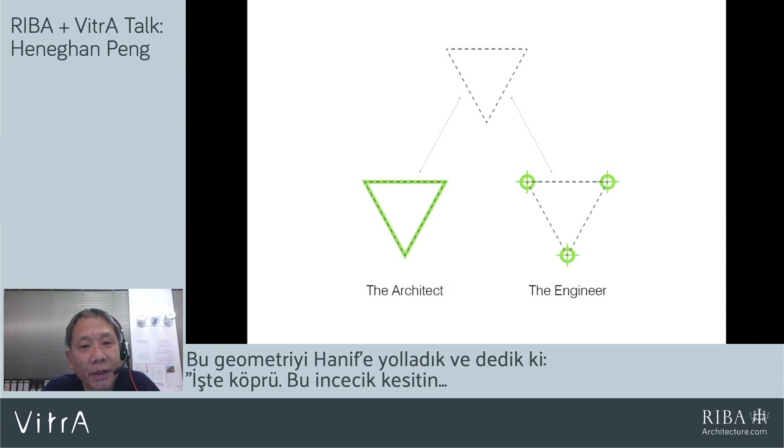It's a common language in terms of the collaboration between the architect, who you see here on the left-hand side, and the engineer, on the right-hand side. The best example of this is when we did the bridge for the London Olympics. We worked with Hanif Kara of AKT2. This is a cross section of the bridge, which is a triangle. We sent our geometry over to Hanif and said, here's the bridge, let's see if the very thin cross section could span the Carpenter's Lock.

Interestingly enough, by the time we got to the competition, they came back and said, "Oh, no problem, it works." What we discovered immediately after we won is that the triangle the architect took was actually the skin of the bridge, which is the architectural component. What AKT took as the triangle are their centroids, which is the grid. In structural terminology, that is very much what they would use for analysis.

The best part about this is the engineering component doesn't actually fit into the architectural component. They both desperately desire to occupy that same triangle in the exact same place and time. Obviously, we got it working in the end, no problem. But it's this kind of disjunction that we believe the grid is very successful in addressing.

So this is just a basic diagram showing the degree of architecturalness. On the left-hand side, you have low architecturalness. On the right-hand side, you have extreme architecturalness, which we would call iconic projects. The funny thing is that, oddly enough, the more architectural a project becomes, the less engineering it becomes; they literally work in exact opposites. Is there somehow a happy meeting point between architecture and engineering?

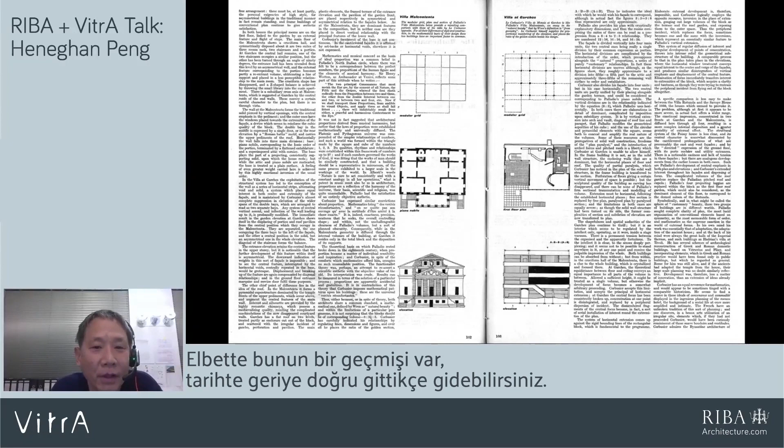Obviously this has its history. It just goes back and back further in history. On the left-hand side is Palladio. On the right-hand side is actually Garches by Corbusier, and you can see the red lines, which talk about an AB organization of the grid.

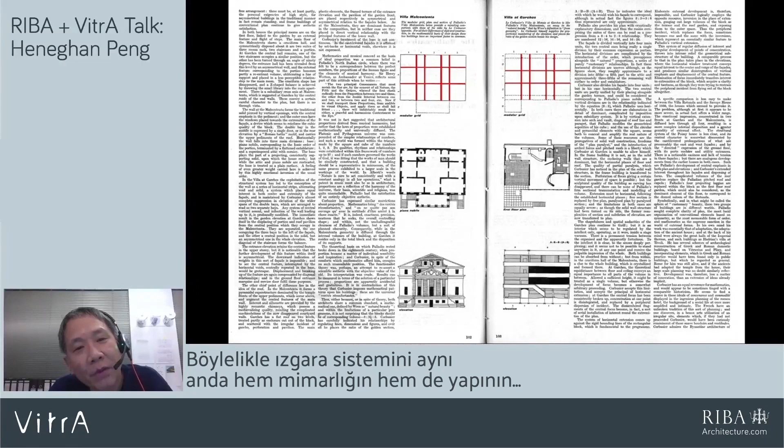Obviously, it's much looser for Corbusier, but those red lines are very clearly the structural lines that keep the building up, and simultaneously they create a rhythm between what is primary and secondary, at least going north and south within each building, and a kind of triptych organization in both directions. So one can begin to see that the grid can be both architecture and structure simultaneously.

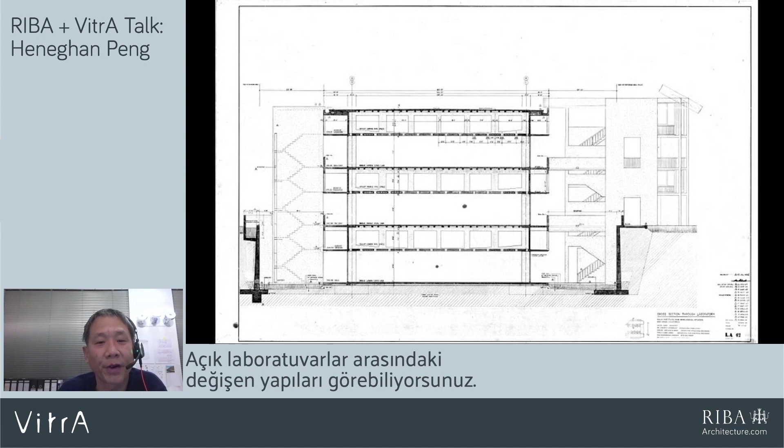The classic modern example of this is Kahn. He and his engineer Komendant have, within every single one of these buildings, very much described that architecture and structure cannot be separated. The prime example is the Salk Institute. Here you see the Vierendeel trusses, the space in between the open labs. At the sectional level, the grid, which is the level planes of the truss zone or the service zone, very much describes both the structure of the building, which creates these columnless spaces, but simultaneously also the service areas that serve both above and below.

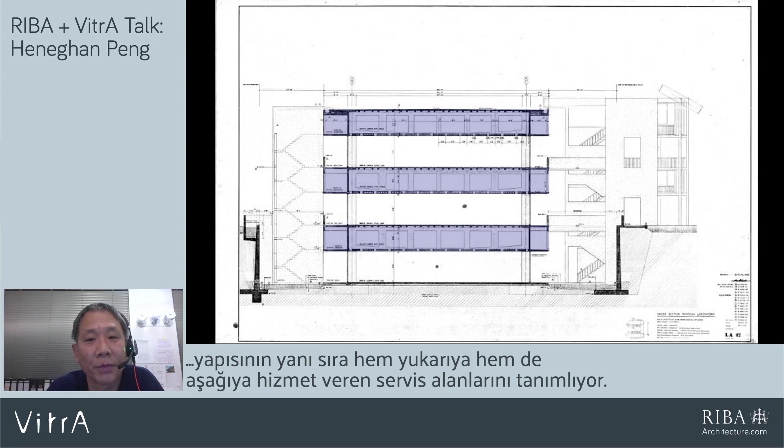And what this begins to show is that if you find the intersection between two ratios, and Francis Archer can actually do this in his head, the XY positions of over 90% of the points are actually rational numbers. They are not irrational numbers with funny things after them. So you can pretty much know where any seemingly random form is in three-dimensional space by understanding the relationship of two ratios.

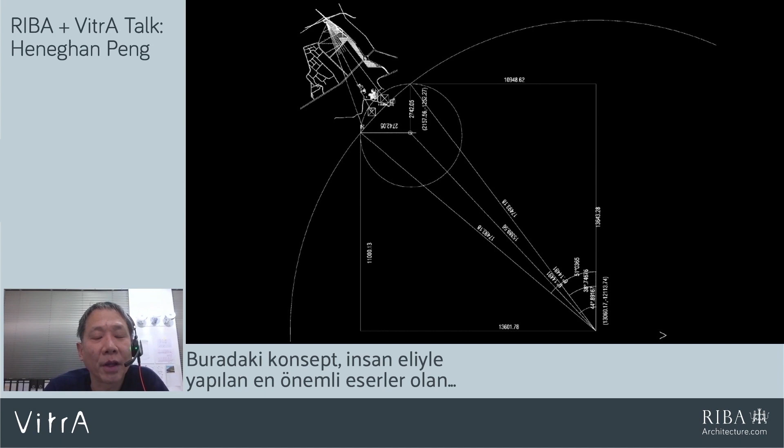You can see that the 3 pyramids, any 3 points describe an arc. Here, you can see that the pyramids describe an arc from the lower right-hand corner. And the museum on the upper left-hand corner is actually kind of a mirror of those 3 lines. The concept being that the museum actually inscribes within its galleries all 3 pyramids, which are the most important artifacts.

So we'll touch on the architecture, but because that's not really the point of the talk, I'm going to try to just hit a few bullet points. Egypt or the Nile is described by 2 starkly juxtaposed conditions. That of the desert plateau, which is approximately 60 meters above that of the Nile Valley. The Nile irrigates the Nile Valley at the lower level and creates an intense greenness.

And everything we know to the left and right of the Nile as one extends beyond the kind of lush green Nile Valley will be the desert plateau, meaning the tombs, Tutankhamun, all of that of death will actually occur within the desert, and that of life in the Nile Valley.

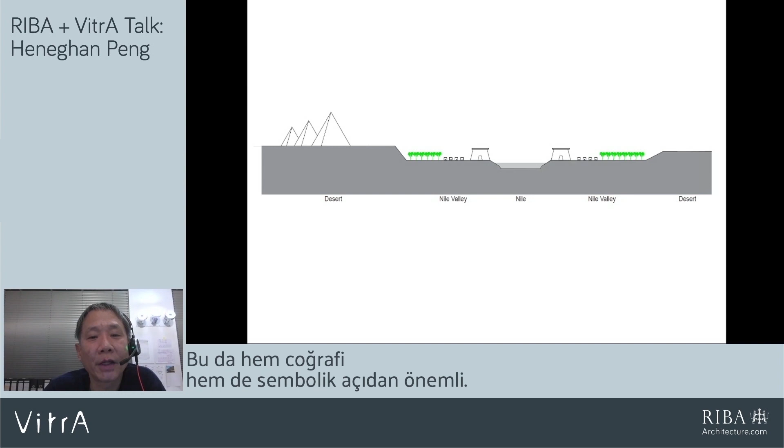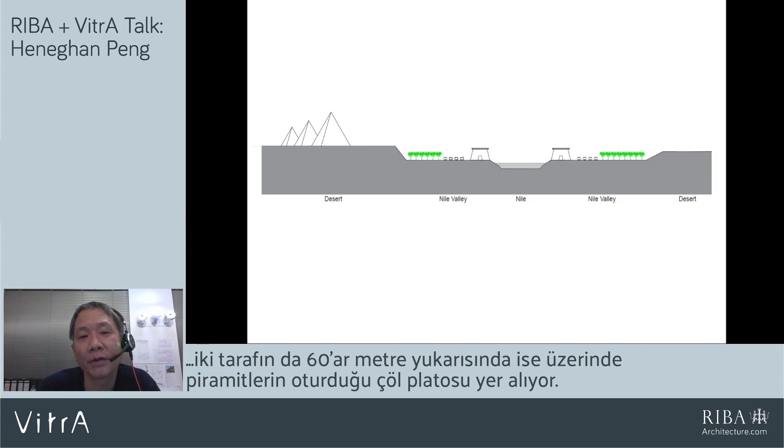Here you can see a cross-section through the kind of geographic landscape, which is both important geographically and symbolically. You see the Nile in the middle. To either side where the trees are is the Nile Valley, and lifted 60 meters above to either side would be the desert plateau, on top of which the pyramids would sit.

The site is actually fantastically located. It's located precisely at the point where the desert plateau would rise and the Nile Valley would end. So again, just by the mere selection of this site, which would house Tutankhamun, it would very much describe the geographic and symbolic importance of this kind of geological condition as something that very much described Egypt all through its history.

So as far as the grid is concerned, the most important thing of any grid is to set the origin. So regardless of anything, we need to start somewhere. We set it on the upper left-hand corner where you see the lines occur. It is actually in a traffic roundabout. The client didn't like that, but you don't really see it in the end, so maybe that would work for him. So we fan out this kind of line.

The first line actually is precisely the line where the 60-meter sectional condition would occur, where the Nile Valley would stop and the desert plateau would arise. And from that kind of geological condition, we fan out the museum to capture all three pyramids within its kind of space or body.

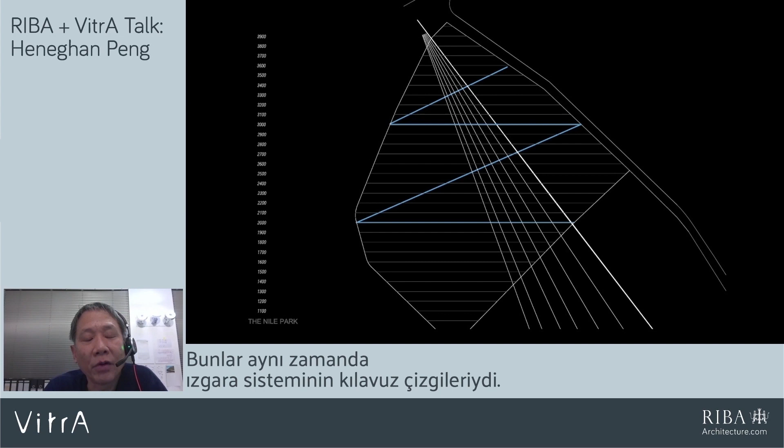It is a museum, it is a chronological museum, so overlaid onto the site is a chronological series of horizontal lines going from the most modern times to the lower portion of the screen, which is the furthest back in history. And those would effectively be also the grid lines.

Here you can see on the left-hand side is the line that is between the traffic roundabout and the tallest of the pyramids, and how it fans, and that again is the kind of cliff face or sectional condition as it fans out to capture all three pyramids. We actually also in section connect the museum to the top of the tallest pyramid.

And the funny thing about this is that in order to get our perfect numbers, we actually have two drawings which connect to the top of the pyramids. One is the architectural drawing, which connects this kind of mysterious height with a funny number that we can't figure out why. And the second drawing with the red line actually connects to a perfect number, which has all zeros after that. We use the perfect number drawing for the construction set because it produces perfect numbers in the museum. And we use the funny number one for the client because it has to be architecturally mythical and connected.

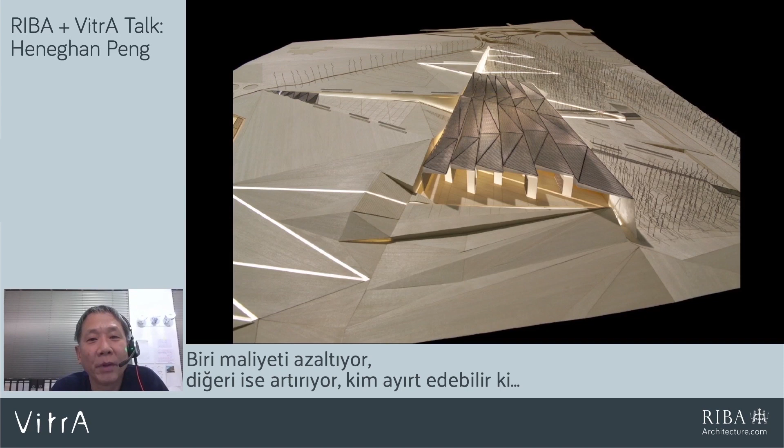One saves money, one costs money. Nobody can tell. So this is the view of the museum from above with the fanning roof that goes out to the pyramids.

So the grid: typically what happens in a building is that one puts the grid itself, or the building grid or the column grid, however you call it, over the building. And the spaces or landscape around the building would be designed by landscape architects.

For us, that wasn't possible because, first of all, the museum had two aspects to it. There was a museum which dealt with all the antiquities, and then there was something called the 24-hour museum, which is all the landscape within its periphery. And that is in many ways the living museum, because that will be an open park which will be available as public space for one of the countries with the least amount of public space per capita in the world. So it was an important part to engage both local and international.

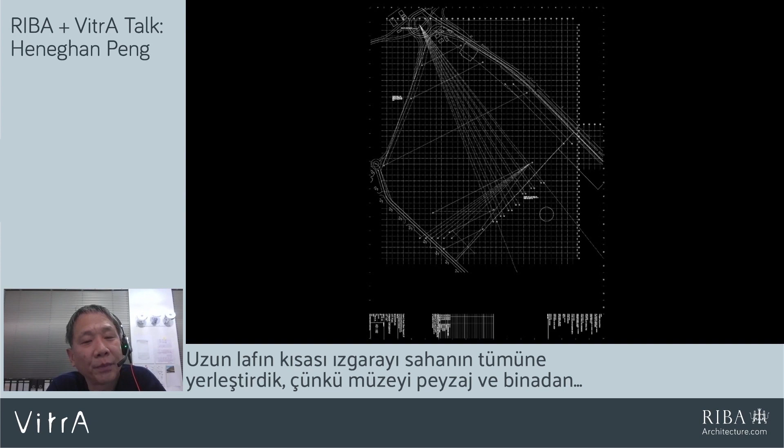But the long and the short of it is that we put the grid over the entire site, because that allows one system to capture the entire museum, both landscape and building, within one holistic system. In some ways it's like the Nile Valley, the irrigation system that was controlled by the state in order to regulate, to govern.

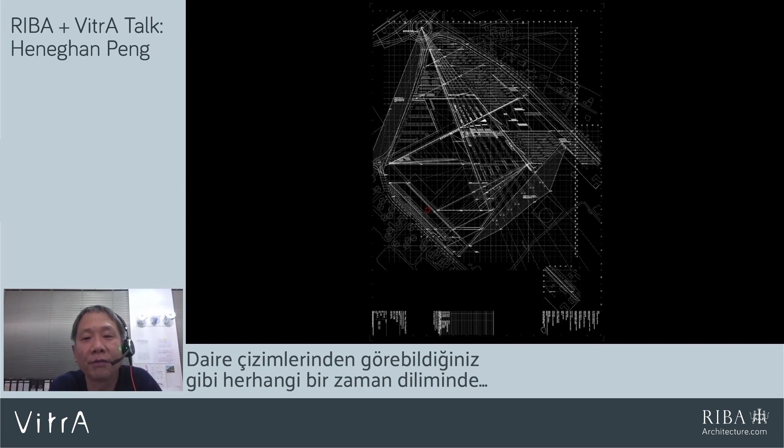The building would then use that grid to describe itself over the entirety of the site. So at any one point, anywhere on the site, whether it's a tree, a bench, a toilet, a plinth, all of it can be found within the grid system. So, similar to the drawing of the random circles, we can find anything anywhere at any one point in time extremely quickly.

Overlaid onto that is something they call the Nile Park. That was an important component of the brief. And the Nile Park for us doesn't divide what is architecture and landscape. It merges the two together because it traverses both landscape and architecture without actually flinching.

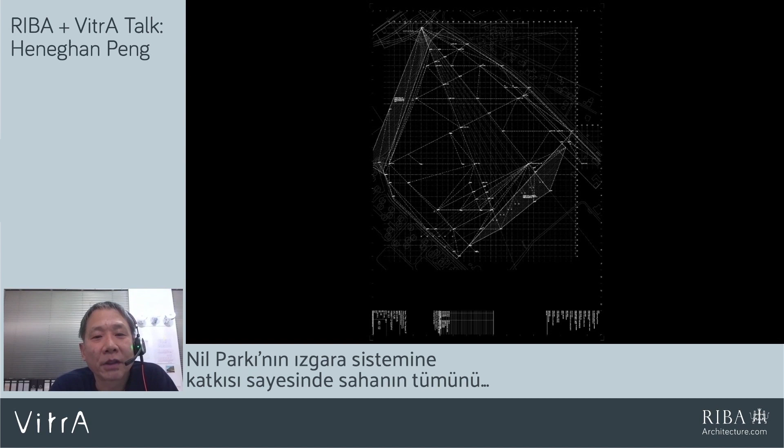The site is a little bit over a kilometer by a kilometer. What the Nile Park does, with the grid, is allow us to triangulate the whole site. So rather than doing contours, which is extremely geometrically heavy and very hard to locate and control, we can control the entire topography in terms of its ups and downs and sectional condition with just a fragment of the number of points that are needed to control it via contours. So this was very powerful because we were moving masses and masses of sand in large swoops rather than trying to shunt them around with tiny contour lines.

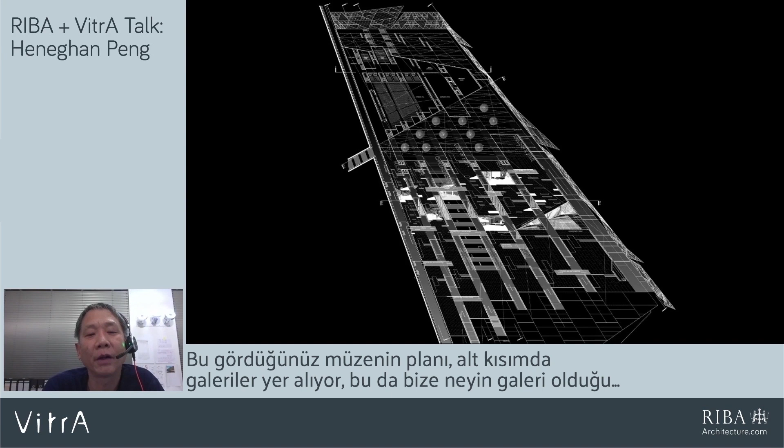This begins to hark back. This is the plan of the museum with the lower portion being the galleries. This starts to touch back on the previous image with Palladio and Corbusier, where we have the spacing of what is gallery versus what serves. The blue being the service zones, and the remaining space in between would be that of the galleries.

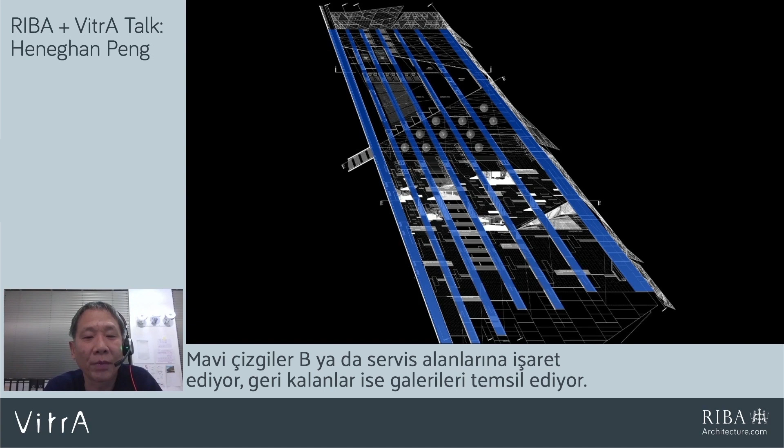The reason we use the number 12 is that it's good for value engineering, because it's the smallest number with the maximum number of divisors. So 12 can be divided by 1, 2, 3, 4, 6, and 12. So again, it allows us to cut things like glass sizes, stone sizes, everything within the building, to smaller sizes or increase them, in order to value engineer the project, but also to limit the number of redraws, because we can subdivide and pretty much the building stays on grid.

The trick behind this is that part of the museum, let's see if that, oh, nope, there. We'll talk about that later, but the museum is actually formed off two systems, one which is the number 12, which is 1200, the other which is a binary system. And the grid that Francis drew didn't work in terms of the binary.

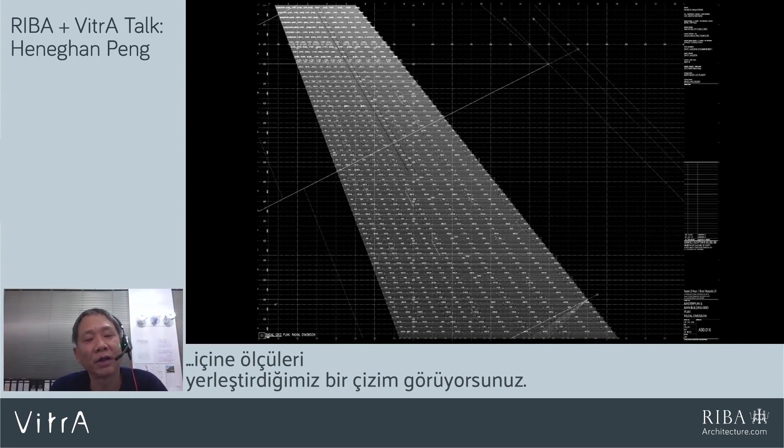So let's just say that's the grid. This was just a drawing. We put dimensions in to illustrate the fact that the formula actually works. And if I zoom in, okay, so if I take the grid line, you can see in the middle right, S18. So if I take 18, which is the grid line, multiply that by 25, and multiply that again by 18, I get the number 8,100. You can see right there, the number next to S18 is 8,100.

And you can pretty much go through the entire plan, and you will have every dimension without seeing a single dimension in the drawing. You just need the grid line, and you need to remember that previous formula: 25 times grid line times the unit.

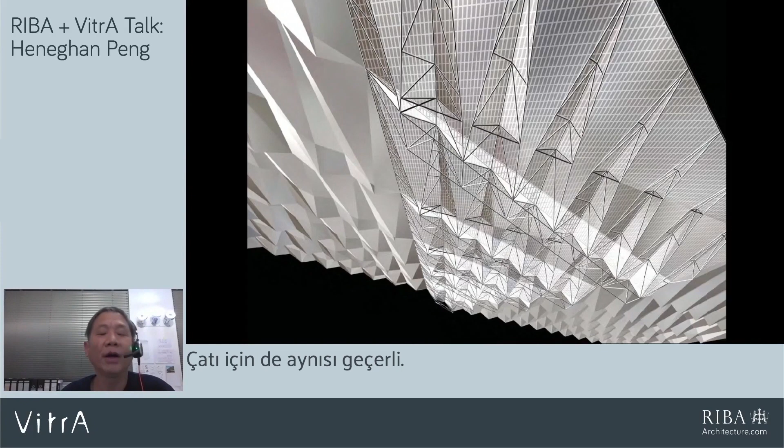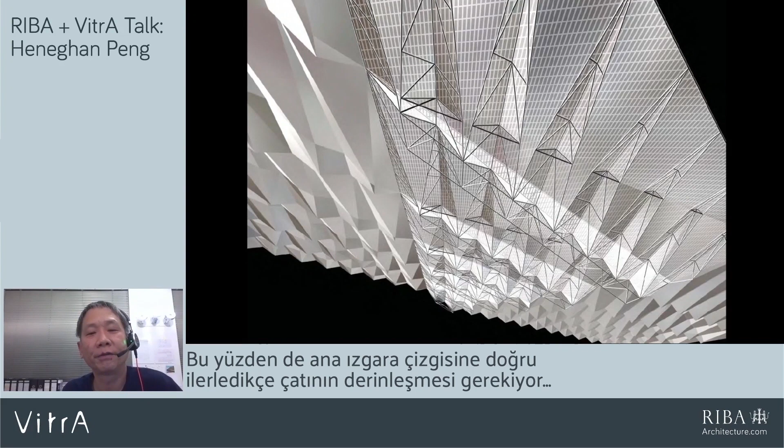The roof does the same thing. It spans over different portions of the building. Obviously, the 30s and 36s would be the narrow span. The 54s and 66s would be the higher span. So the roof would need to get deeper as it moved towards the primary grid line, which is the sectional conditions between desert and Nile Valley. So similar to that, I'm clicking on the wrong thing, is the roof.

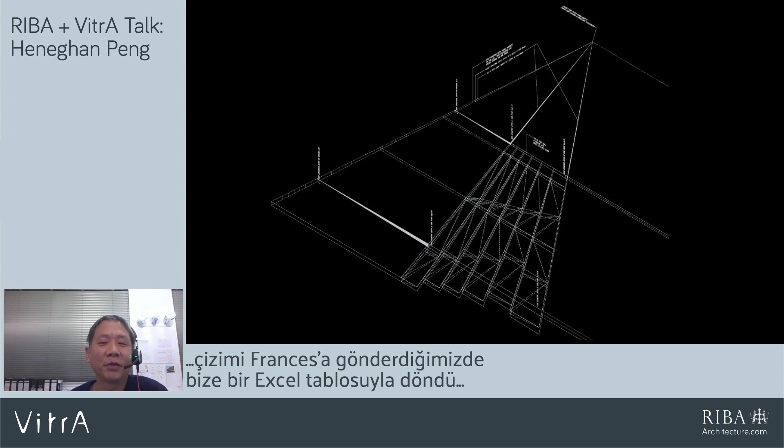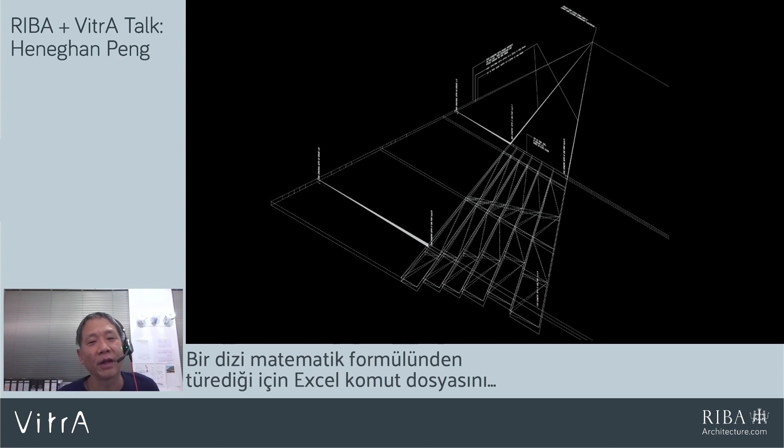I think actually Francis figured out the roof. But anyway, when we finally sent over the final drawing to Francis, he just came back with an Excel spreadsheet, and we said, what are we supposed to do with this? He just said, double click on it. And because it is derived through a series of mathematical formulas, you can pretty much just run an Excel script and it will draw the entire roof for you.

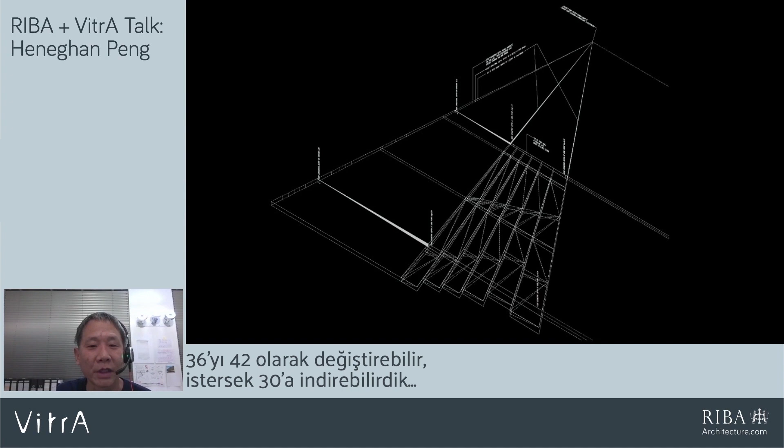And obviously that means we can also modify it as much as we want. We can change the 36 to 42 or the 36 back down to 30 if we need to, and the Excel would just update automatically. Here's the building with the roof off. You can see the B, which is the service zones, and also the 30s, 36, 54, 66 zones of the galleries themselves. And the roof would top the whole thing.

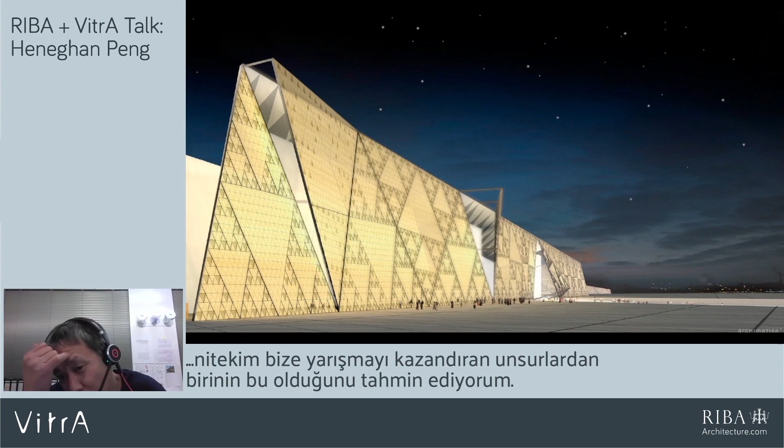So the biggest, most daunting task is this kilometer-long translucent stone wall, which probably was one of the things that won us the competition. It was great that it won us the competition, but it was also very difficult to do. So what do we do? And this is actually a spin-off of a talk we did on weak stone.

So fundamentally, translucent stone is terrible. It generally is used for things like vases, and it's a semi-precious stone. So at the end of the day, it's very weak. It was never meant to be used structurally. And what's interesting about the whole journey was that because of its inherent problem, it no longer has a solution. And because it is problematic, it forces one to invent. For us, that was the most enjoyable part of the project. How do we deal with something fundamentally weak?

There's a large quantity of stone, approximately 4 football fields. You actually need 6 football fields because of the amount of wastage, but it's a lot of semi-precious stone. So in the end, we actually don't buy stone from quarries. We buy quarries in order to get the project done.

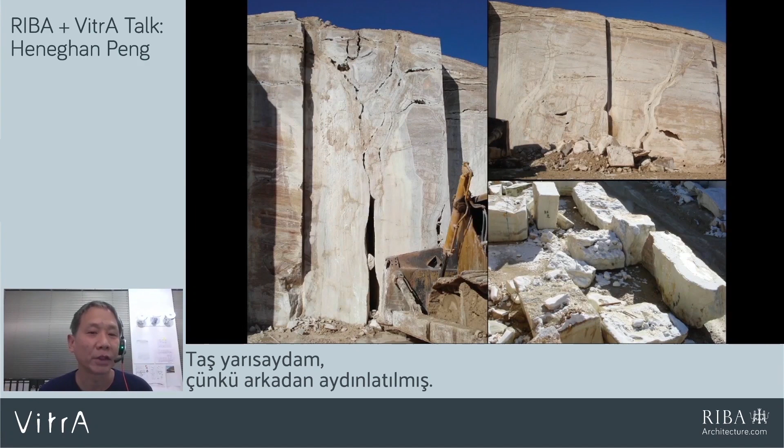So here you see onyx. We switched from alabaster to onyx. Alabaster is gypsum. Onyx is silicate, which is effectively glass, so it's a much stronger stone. So that was a substantial structural shift. It's translucent because it's illuminated from behind. This is one of the quarries that Bruno went to visit.

So the first thing we had to do is you have to test longevity of the stone. So this is something we did in the UK at BRE, where we pushed the stone through some kind of highly accelerated testing. And what this simulates is the effect of sand and wind and rain and so forth on the stone over a course of 50 to 100 years.

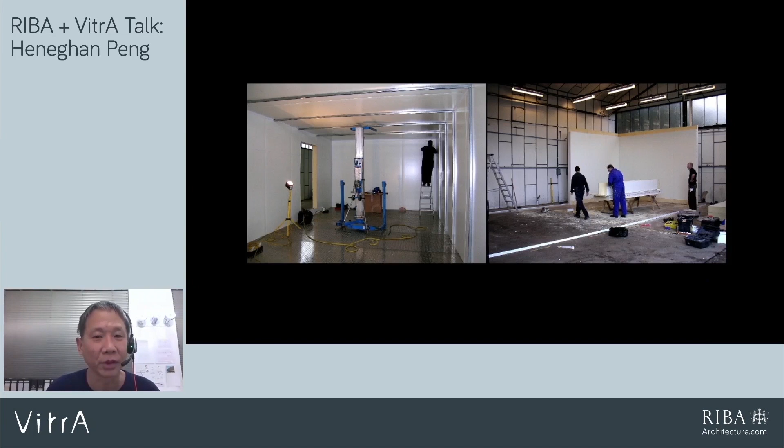This is the testing chamber that was being built, and this is a view inside, hitting with everything from sandblasting to UV, wind, and so forth. The next issue is there's a stone, but there's also the steel that holds it up.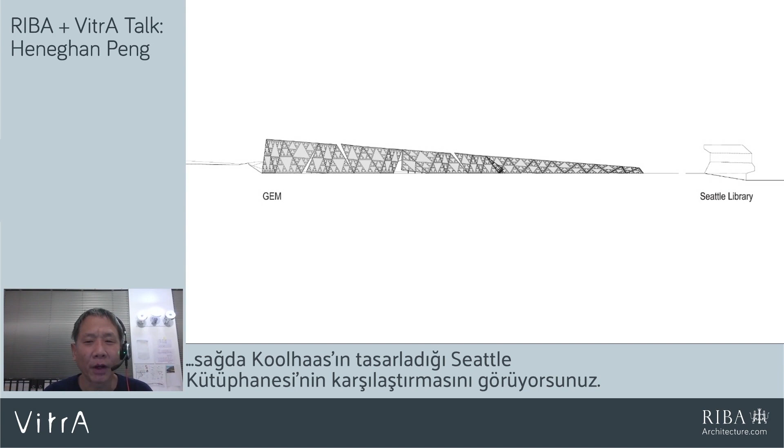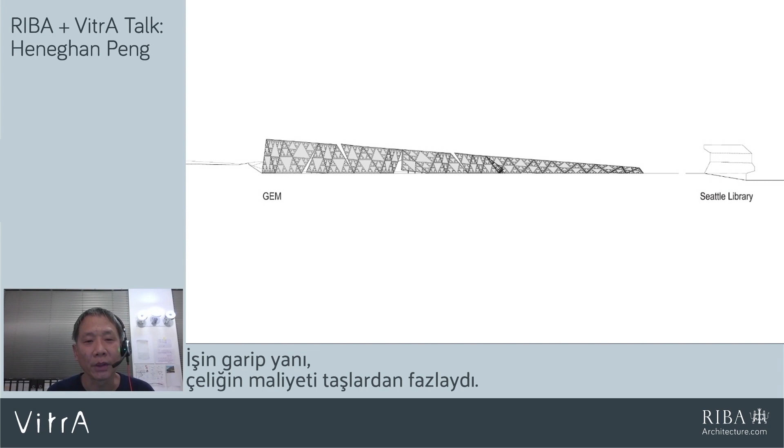This is just a comparison between the GEM, which is the Egyptian Museum, on the left, and on the right-hand side, that's Koolhaas's Seattle Library. You can see the quantum of stone. It's substantially a lot of stone. And the thing about it is the steel actually, oddly enough, cost more than the stone. So there was also a necessity to somehow economize on the steel.

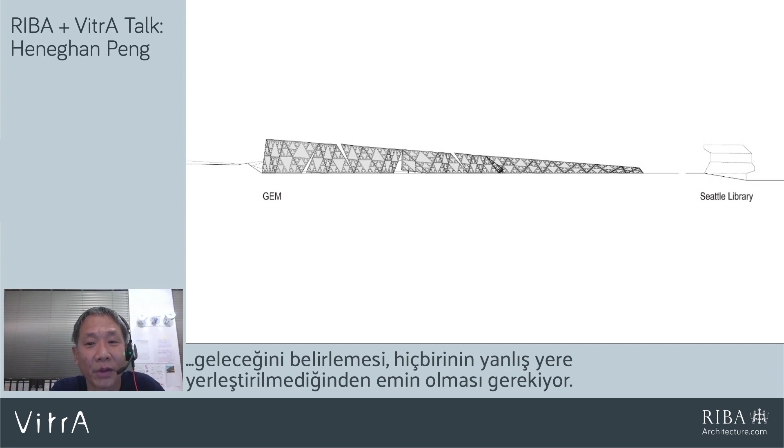Originally when we designed it, there were 2048, which is a binary number, multiplied by 43 mega frames, 2 times. There were 176,128 stones. That's a binary number. That's a lot of pieces, and people talk about CAD CAM and computers can do that, but at the end of the day, some guy has to go out there and figure out which of the 176,128 stones needs to be put where and make sure it's not put in the wrong place. So how do we look at economizing and reducing the draw time on this thing?

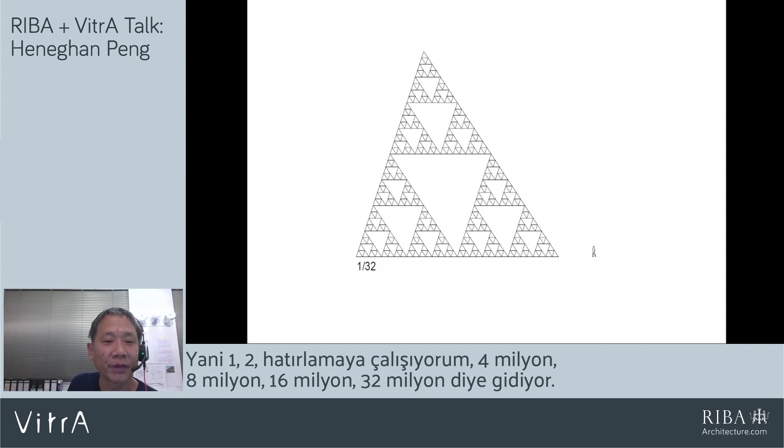So we're going to look at one mega frame, which is about 20 stories high. So what Francis came up with was, why don't we use a fractal system, a binary fractal system called the Sierpinski gasket. What that means is 1, 2, just think memory, 4 megs, 8 megs, 16 megs, 32 megs, and so forth. So we can then subdivide each mega frame by halving the distance. Number one, it is structurally strong. He calls it a tennis racket. And simultaneously, every single one of these stones within the mega frame has the same set out.

So we go from 176,128 pieces of different size stone to 43. That's what the fractal does. So again, massive reduction in draw time and coordination time. So if we go on from there, scale stone. So the subdividing has to do with bending. What is it? L over the bending. Something about bending. I forgot what the wording is.

If you have the length of something, its effective depth doesn't need to be as deep, because it is stronger because it's shorter, and you keep on halving and halving, so that each steel is increased in strength by halving at every half point. So you keep on going down, and the halving actually has to do with the yield of the stone. So depending on the size of the stone, we halve as needed. If the stone yield was good, we have less structure. If the stone yield is bad in terms of the overall size, we need to have more structure.

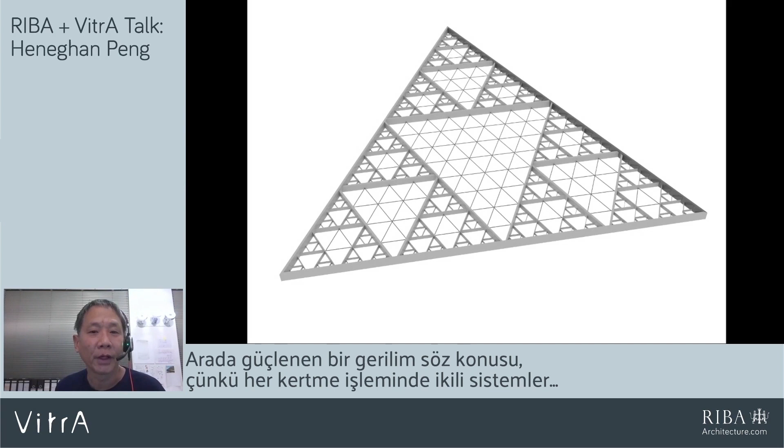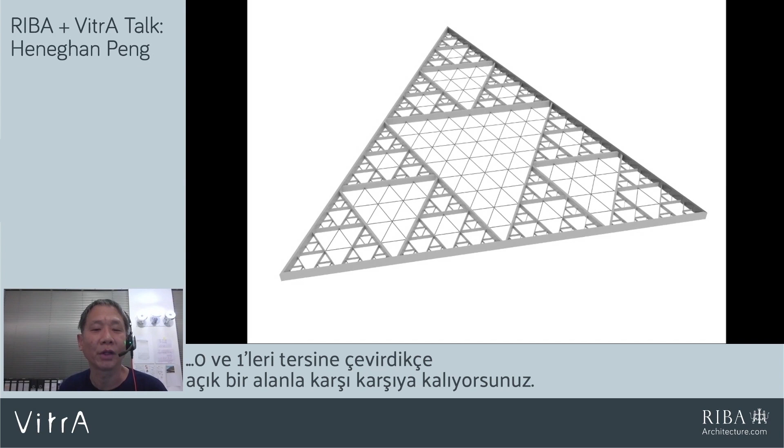And it's a very adaptive system, so that because of the unpredictability of onyx, we don't know what we're going to get, whatever design we draw can adapt to whatever yield is pushed out from the quarry. There's a series of tension nets that get strung in between, because for every halving, which is binary, flipping 0 and 1 in and out, you're left with an open space. So there's a series of tension nets which deal with the weight of the stone, and another tension net that deals with the wind load as it moves in and out. So here's the steel frame.

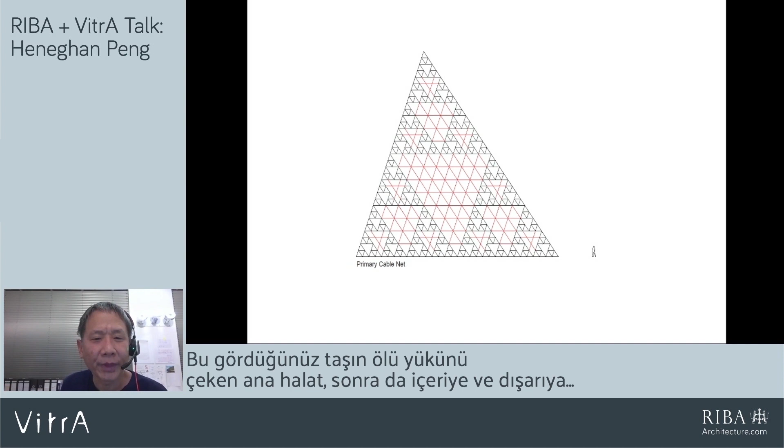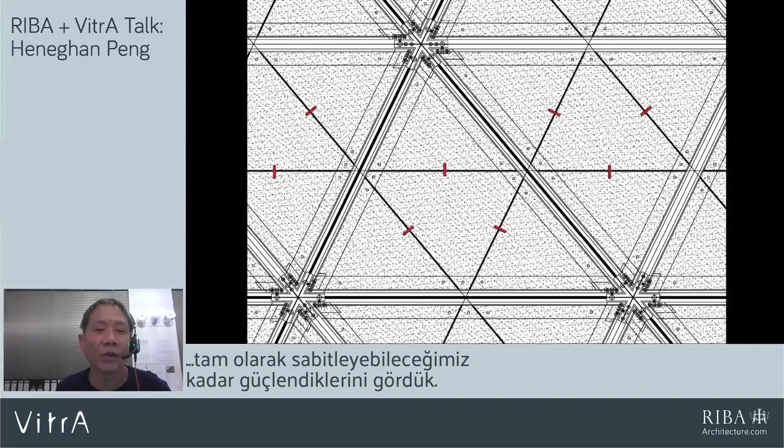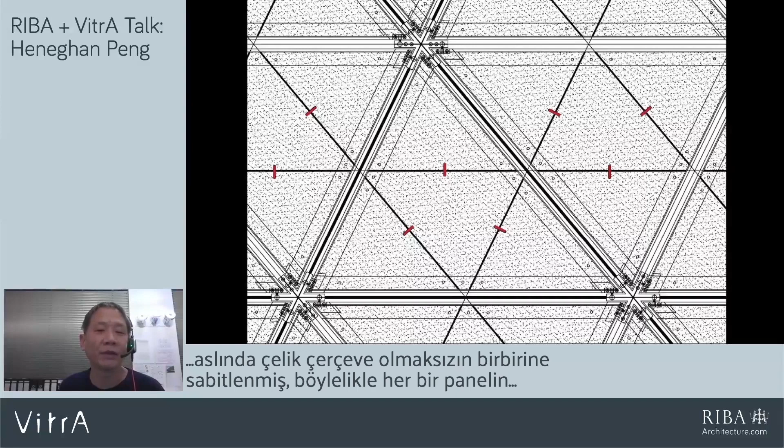That's the primary cable, which is the dead load of the stone, and then there is the secondary cable, which deals with the wind that goes in and out of the page. At a certain point, we can't have so much steel that you don't see stone anymore. But what is fantastic that Ed Forward at Arup actually came up with, he said at that point, the stone is strong enough where you can actually pin them. So the last binary subdivision of the stone, which takes the one triangle and breaks it into 4, is just 4 pieces of stone without the steel frame, but pinned to each other, so that they can fill the frame of each individual panel. So we remove the steel at that point.

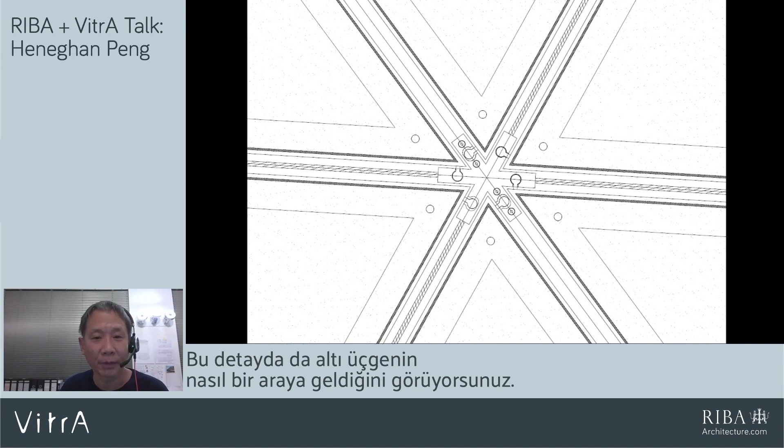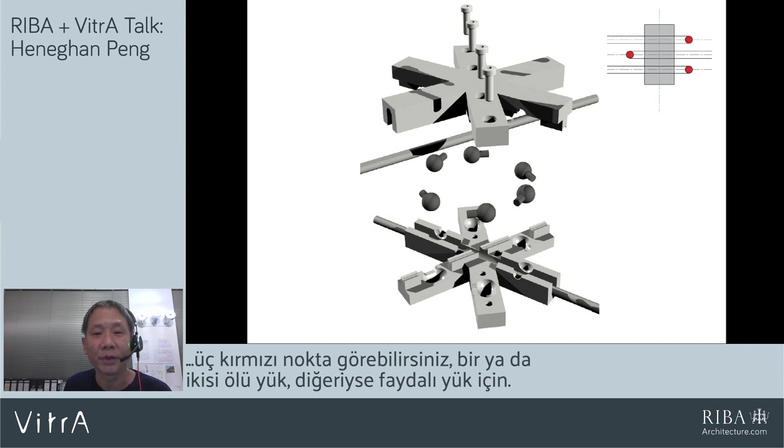And this is just one of his details showing how all the triangles, 6 triangles, come together. The different cables slide through one another. Obviously, the cables can't rub against each other, so you can see in the upper right-hand corner the 3 red dots showing the different cables. 1 or 2 of them is dead load, and 1 of them is live load. And that's just the clamping of it together.

So the structural depth also works with it's not fully halved, but it is somewhat halved. If you start at 150, times 2 is 300. 300 times 2 is 600. Or if you take the whole 900 and you halve it, you have 450 times 2 and you get 900. So for each of the frames, the largest frame will have the deepest depth, 900. The next one will be 750. The next one will be 600. The next one will be 450. And the last one will be 300 and so forth. So they keep on reducing, they keep on scaling down in size.

So again, it deals with some form of mathematical logic that does not need to see numbers as individuals, but as a formula, which means all numbers are somehow interrelated to each other. Thereby, a formula can produce all the numbers rather than having to represent individual numbers. A tremendous sense of economy, and it allows us to manage the project.

One of the things I forgot to mention is that the grid was not just something between us and Arup. We also work with Buro Happold on the services, all the endpoints for the water, electricity. So everything to do with the site, the structure, the architecture, the drainage, the electricity, the power, the roads, the slope, the water is actually on grid. Including that of West 8, who were the landscape designers, who juxtaposed the Nile, the green, with the desert plateau. The idea being that everybody works with the grid, so everybody stays within the remit of the grid.

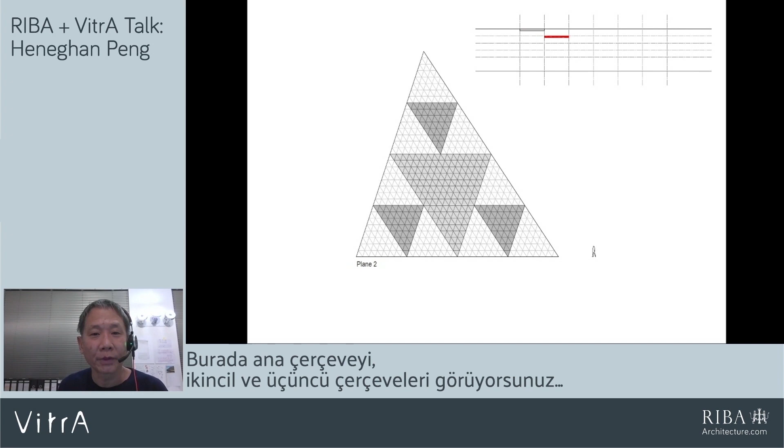From a coordination point of view, we don't look at drawings of the structural engineer or services or landscape and see if they match our drawings. All we do is overlay any two consultants. And if they are off grid, meaning if we see areas which are slightly blurry, we know that area needs coordination because they're off the main system or the secondary system or the tertiary system. So we don't coordinate. We just look for blurry areas. And that allows us to hit 80% of all the coordination between the different disciplines. You can see here the primary frame, the secondary frame, tertiary, and it keeps subdividing. So our coordination is looking for blurry stuff.

So again, this is the binary system. You can see that the stone flips between inside and outside, so it creates really nice shadow. The Minister of Culture was worried until we showed him, talked about that, and he liked it. So that got us clear.

On the last trip to Egypt, Francis did this drawing, which is really interesting. If you take the primary grid line that starts at the big pyramid, going through the roundabout, which is the 000 point, it goes through London, which is where the Arup offices are, and it ends up in Dublin. We know that the globe is round, but even then, maybe we were just destined for each other.

Okay, so the Giant's Causeway, next one. Again, this is part of the Weak Stone lecture. The Giant's Causeway is along the Antrim coastline.

There are more stones on the Scottish side, but the trouble is you can't get to them very easily. You have to go by boat. So this is actually the more popular one because it's quite easy to get to.

The Antrim Coastline is a significant heritage artifact. It's not just the stones themselves. The stones have this unique hexagonal cross section due to the temperature at which the stone crystallizes when it hits the water.

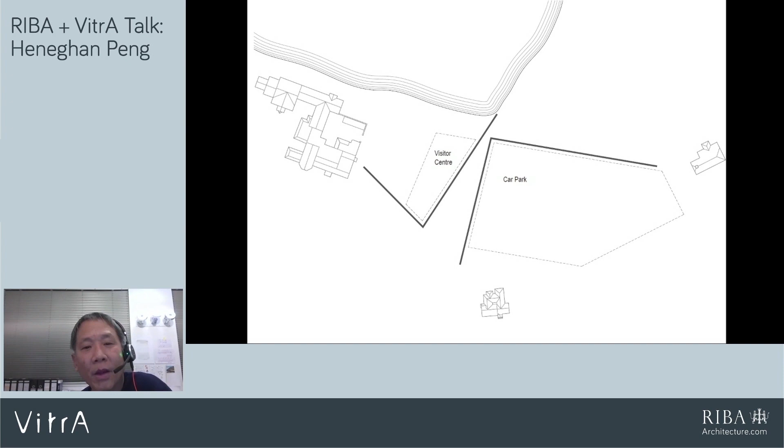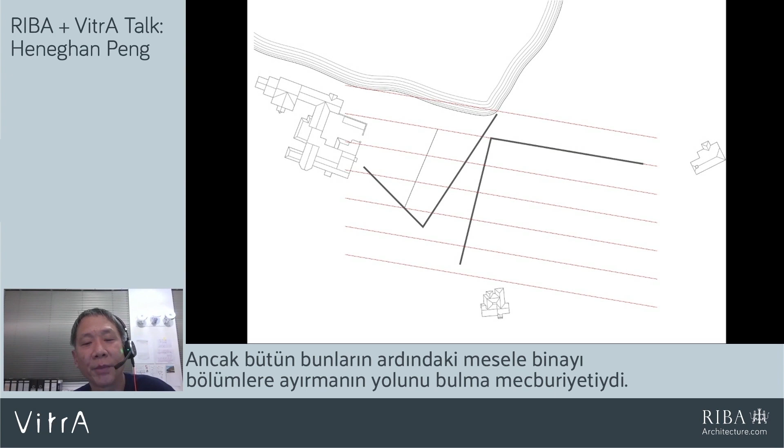So organize and subdivide. So the first thing we did: on the left-hand side, the visitor center, on the right-hand side is the car park. But the key behind this whole thing is how we had to come up with a subdivision of the building. And what we did for the subdivision is we actually used the subdivision of the British Standards car park in order to describe everything about the project in terms of the visitor center.

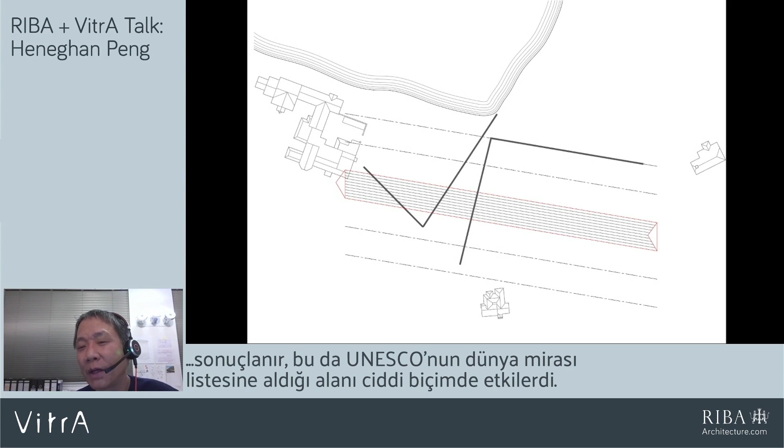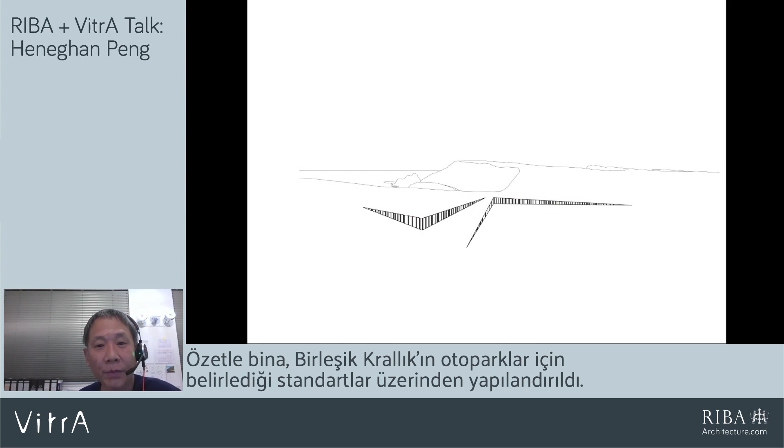Because at the end of the day, if we don't get the car park dimensions right, we expand the car park, meaning if it isn't operating at optimal capacity, we run the risk of having too many cars occupying a larger amount of spaces, which would again significantly impact the UNESCO World Heritage Site. We want to keep our footprints small. The visitor center, if it's off by a few mil, nobody really cares. So the whole building is structured off British standard car parks. That's the stone itself. So basalt.

Basalt. Here's the stone quarry, right around the corner, McConnell's. And then the thing about basalt in Ireland: the only thing that it's used for, because it is so structurally useless, is to grind it up and use it for aggregate in roads. That's it, nothing else. So how do we deal with something which is effectively utterly useless?

So this was showing the compressive strength and the flexural strength of stone, meaning tension versus compression. The compression you can see is actually quite good. Tension is bad. It actually has nothing to do with the fact that it's good or not. It has to do with the line that keeps on bouncing up and down. And because of that, it's terribly unpredictable, and we don't know what we're going to get. Granite would be straight. So how do we incorporate that as something that deals with the unpredictability or risk within the overall project?

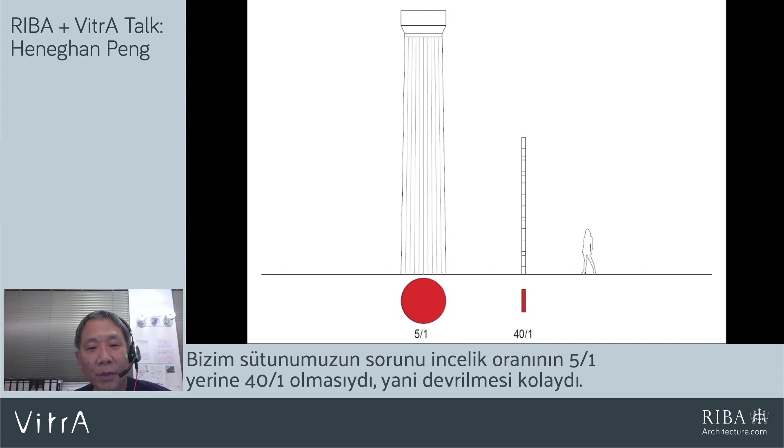The first thing we did, because it is so weak in tension, we have to look back at the Greeks. So we are no longer cladding the building, because it would just fall apart. We are just stacking lumps of stone. So every piece of stone is pretty much solid in that building, something that they would build 2,000 or 3,000 years ago. But the trouble with our column is it has a slenderness ratio of only 40 to 1 instead of 5 to 1. So it's easy to fall over.

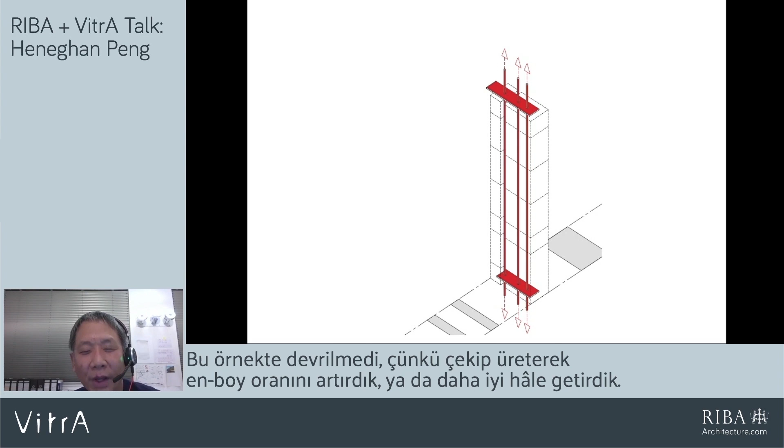So what we had to do, again, with something very weak, how do we invent something around it? So we stacked the stone, we put dowels in it and we pull the stone. So we simulate the dead load of the Doric column by basically pulling back at it. So therefore in this particular case, it doesn't fall over, because through pulling we make the aspect ratio better.

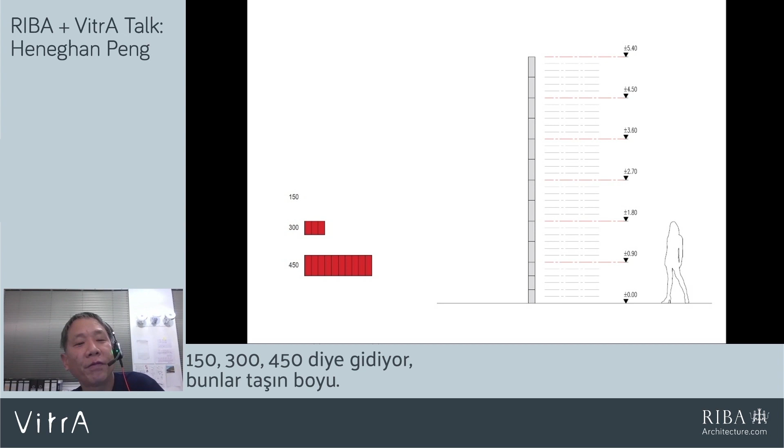So on the left-hand side you see the joints, 150, 300, 450. That's the height of the stone. Obviously, we would like 450 stones because they're higher, less joints, much better. So our hope in the beginning was that we would have very few 150s and a lot of 450s, so everything seems very monolithic.

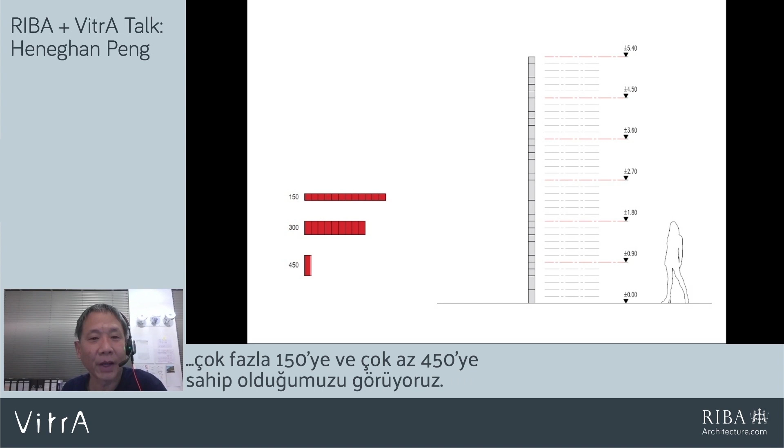We did not draw one facade for the client, because if we drew one facade, the contractor would have kept on blasting to get that size, and that would have been an exorbitant amount of money. So we just said the sizes of the joints are dependent on the yield of the stone. So if you have a not so good blast, you have more 150s and a little less 450s, and somewhere in the middle. And you can see with a really bad blast, we can have a lot of 150s and very few 450s. And you just increase the number of joints.

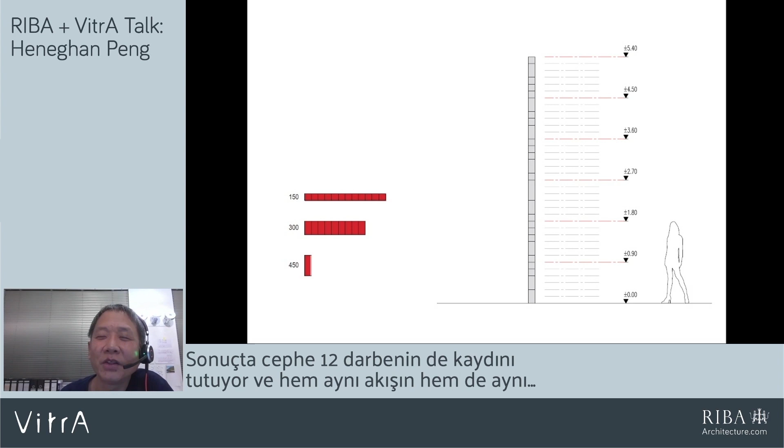And what's interesting about this whole thing, at the end of the project, there were 12 blasts in all. You can actually walk along the facade and see: that was blast 1, great blast. Oh, 2, getting worse. 3, getting really bad. And it just kept on degrading. And then we got a few blasts that were very good at the end. So the facade actually registers all 12 blasts, and not only is it part of the same lava flow, it actually is part of the same yielding process, 12 blasts that would occur over time to build up that wall.

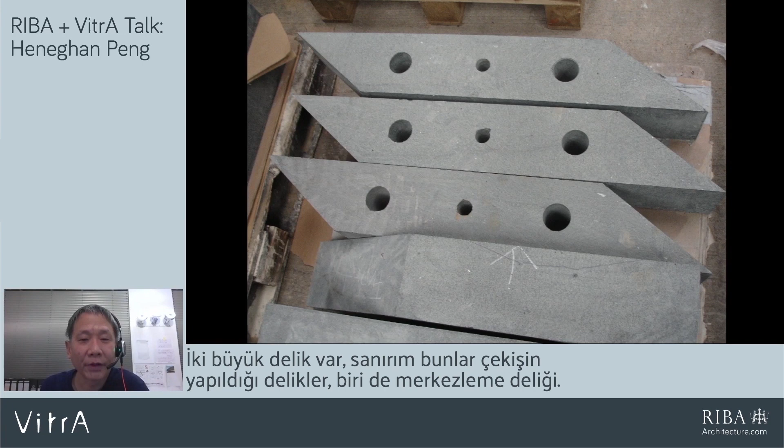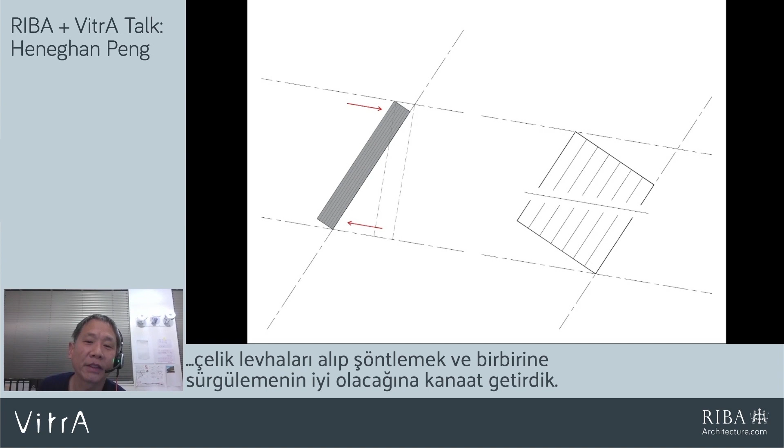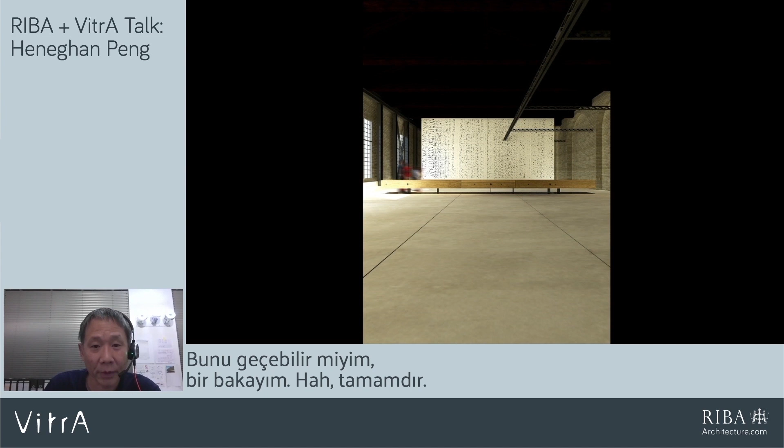So you can see it's very quiet. There's nothing in the room. There's just one bench going across the hall. But when people start to sit on it, you can now see that it activates the bench. And it's 6 pieces of a seesaw. But when one sits on it, every piece moves because they're all interconnected. So there's 6 benches. There were 6 consultants on GEM. How do we collaborate and make the whole thing come into balance?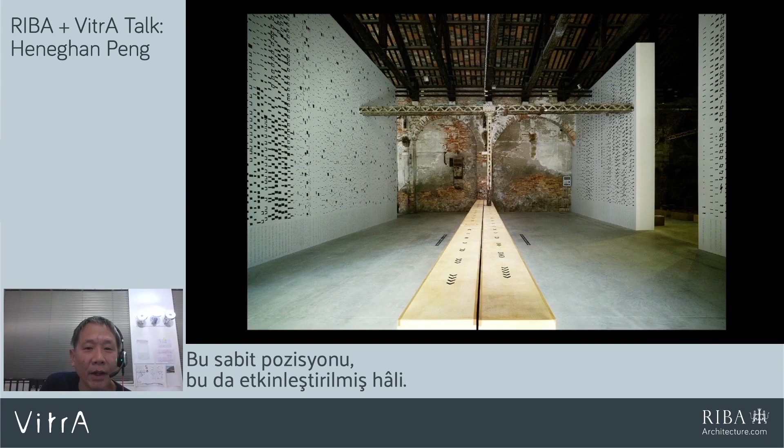So that's the bench in section. That's the bench in its resting position. And that's the bench when it's in its activated position. So the whole thing activates and we don't know what it's going to go into.

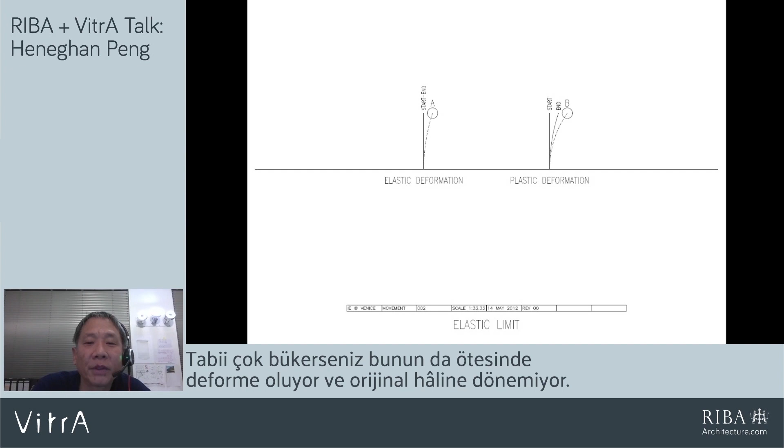The most beautiful thing that was developed by Holger during this time was this notion of plastic versus elastic deformation. Effectively, what that means is you can bend steel and it'll bounce back to its original point. But if you bend it too far, it deforms beyond that and it can't bounce back. So the key with the bench is that we have to stay within elastic deformation where it keeps on bouncing back. It's quite beautiful. Very architectural.

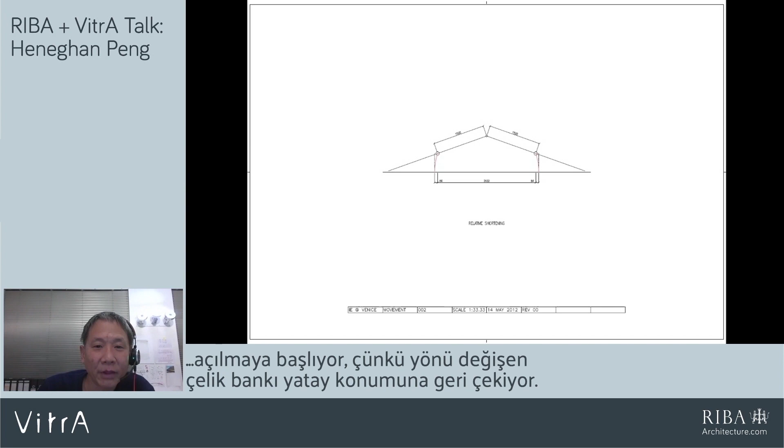And that's the bench. You can see that when you sit on it, it bends, and you can see at the very center at the top where it begins to open up. And because the steel will deflect and pull, it will pull that bench back to its horizontal position. It will tend to always go straight, provided it stays within elastic deformation. Don't bend it too much, in other words. So I don't know why I'm showing the same one there, but anyway, that's the bench.

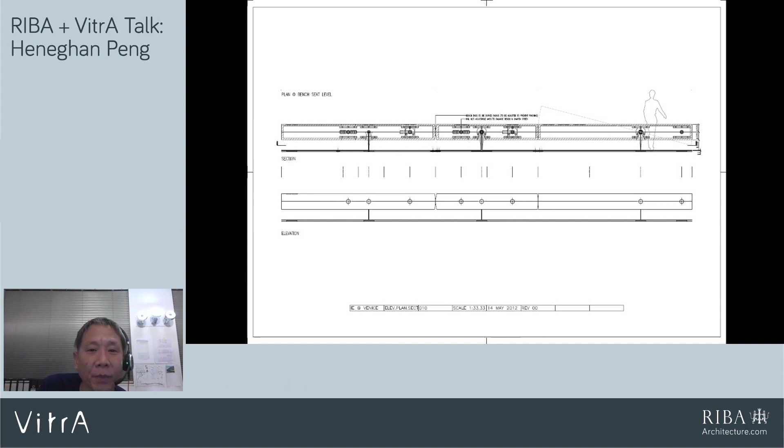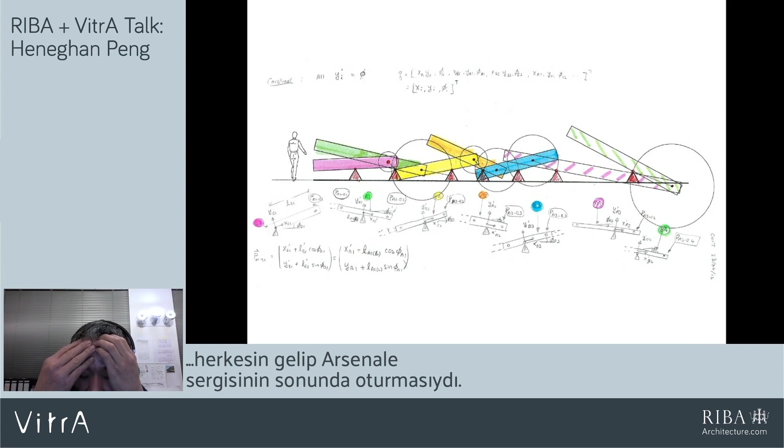Here's it in section. Here's the kind of pin that rocks back and forth. The great thing about the bench, and I forgot to describe this in the previous image, is what happens: people come and sit down at the end of the Arsenale exhibition. One person will sit down. When somebody else comes to the end of the exhibition, because they don't know that previous position, they would sit somewhere else. What then happens is that the first person sitting down would end up bopping up because the other person would have moved one of the 6 benches. And then when somebody else sits down, the 2 people would bop up.

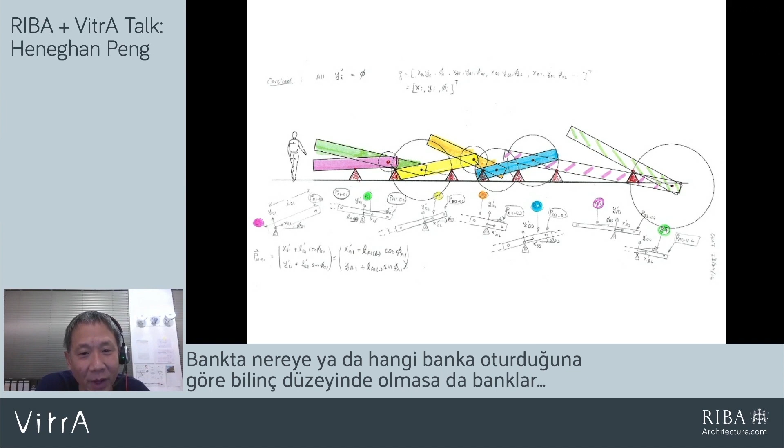And depending on where you sit on the bench and which bench you sit on, everybody would start to move and come into proximity, not because of intention, but because the benches are interrelated. It's like a bunch of consultants that never worked with each other coming together. And it's slowly over time that different people shift along the bench and jump up and down. You can actually get a dozen people together if they work together and find the motion, and they can get the entire seesaw to work. All 24 meters of it, you can get a dozen people who don't know each other to get the whole thing in balance so that it begins to rock.

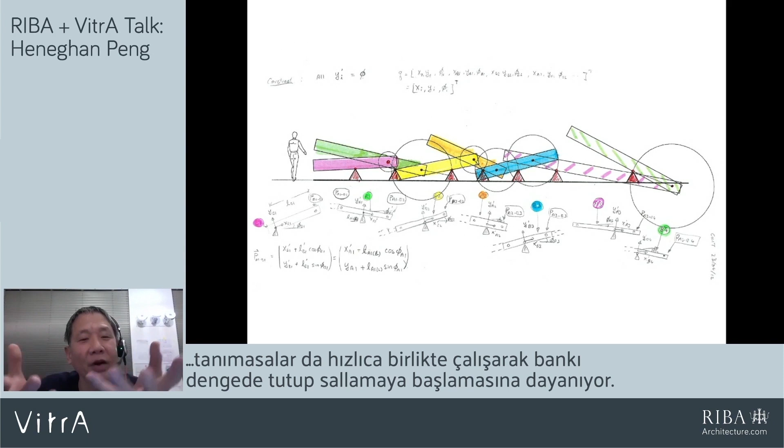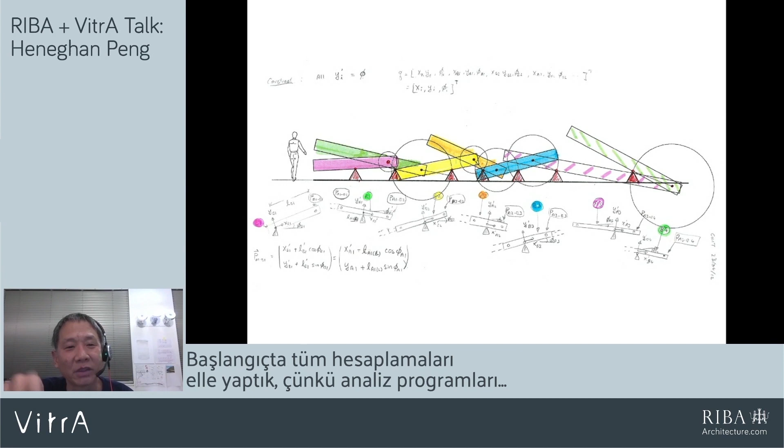And that was effectively the whole concept of this collaborative spirit, this notion that different people come together, don't know anything about each other, but somehow you can very quickly work together to get things into balance so that you can rock the bench. So this is just an analysis showing that the trouble with the bench is that engineering programs make buildings not fall down. The bench actually works perfectly in failure, meaning when it rocks, it's actually in failure. So none of the engineering programs work. So we did all the calculations at the beginning by hand. Analysis programs don't calculate buildings to fall down.

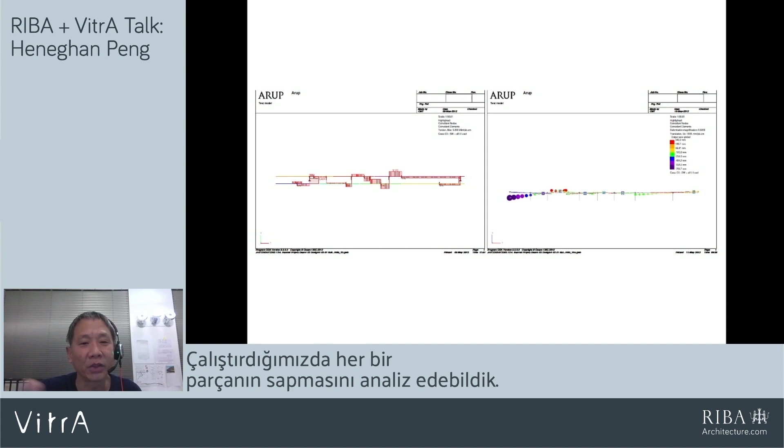So anyway, here's the calculations. And once we got it going, then we could pretty much analyze the deflection within each of the pieces. We just like that drawing. And this shows the kind of, this is all staged, so people look kind of good and in control, but they're not until they get balanced. And then we had to build it.

We sent the drawings. We went to Germany. We spoke to a bunch of people. And you can see, again, you have to track the pink line at the bottom drawing. You can see that the pink line zigzags up and down.

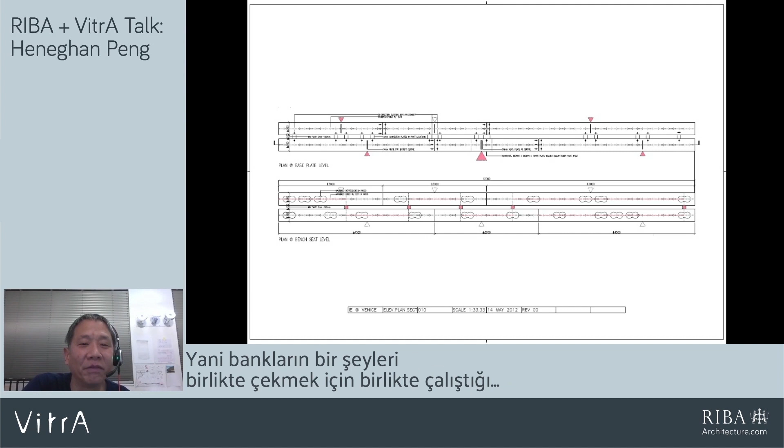It's one continuous line. And what happens in Germany, they actually, because of the risk involved, which is probably a smart move in the end, they severed all the links between the benches so that each bench was linked, but each bench balances itself. So they removed all that plastic elastic deformation thing where all the benches work together to pull things together. They basically balance each bench by itself. They're still linked.

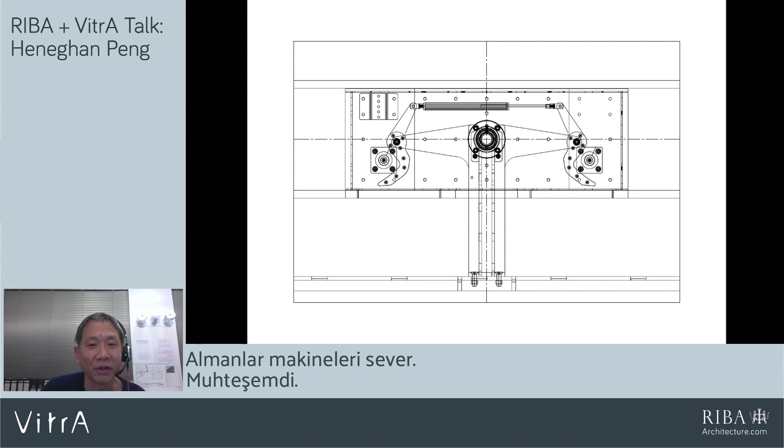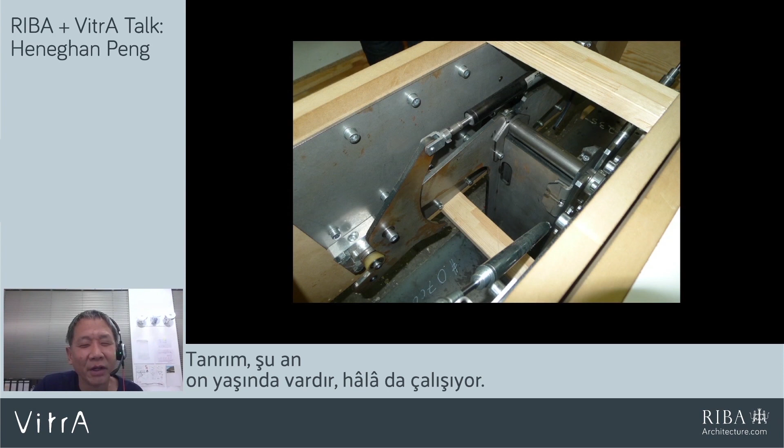But anyway, they did a beautiful mechanism. Germans like their machines, everything's mechanical. It's absolutely brilliant. That's the bench being made, or seesaw, however you call it. That's the mechanism. It still works. It only got dismantled last year. Different clients take it and put it in their offices. It must be 10 years old at this point. It's still working. 7 years.

It's like, you know, BMW motorcycles. They keep on working. It's still working. And that's the end of the talk. I am 4 minutes under.

Thank you very much for your lecture. It was an incredibly interesting insight into your work and incredibly in depth. Thank you so much. We have a couple of questions which have been sent through by some of the audience and have been collected through Instagram. And it'd be great to hear your ideas on them. I'm going to just jump straight into it.

So the first question relates to some of your projects which work in more historically sensitive sites, especially restoration projects. And the audience member would like to know what are the most crucial design decisions that you need to take into consideration when working on projects and sites of historic significance?

I think with the National Gallery of Ireland, or with the Trinity project, it was trying to find almost its special voice, or trying to find something that was very particular. So, for example, the National Gallery is not a perfect gallery by any means. It's developed over years of history, and when we started, we had this tendency to almost flatten it, to make it more perfect. There were so many really annoying things. You're like, oh, for God's sake, why couldn't they just straighten this out?